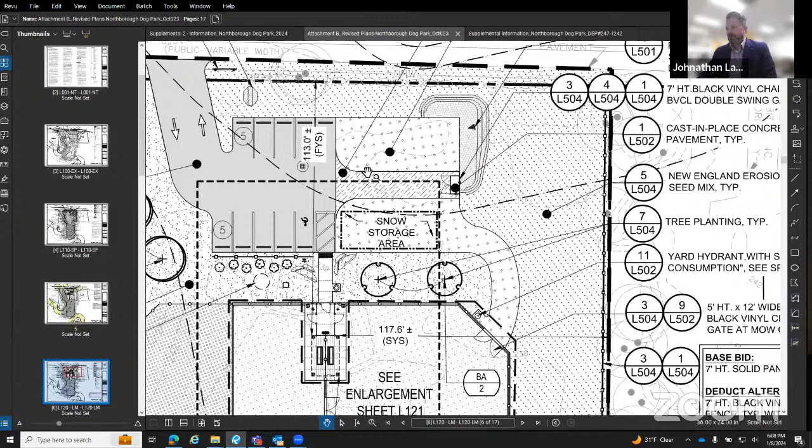Another change that has been made since you last saw this design was this overflow parking area. If you recall, it was originally going to be all asphalt millings. Now there's just this central section that's asphalt millings to access this small dumpster area, and then the rest of it will be 3/4-inch crushed stone paving.

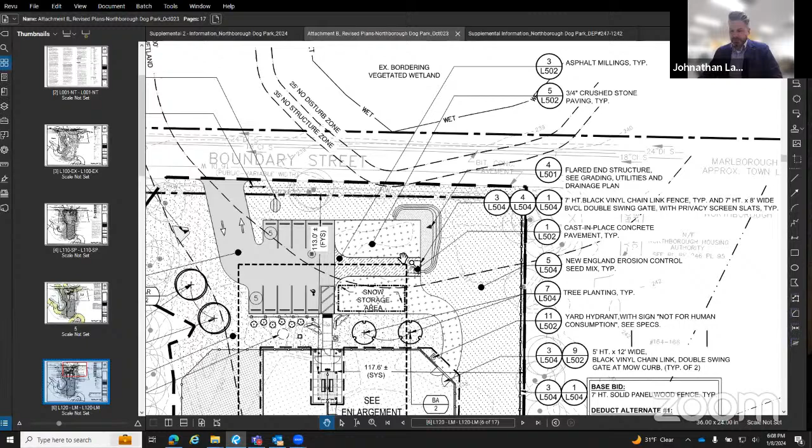The snow storage area is now located here. We submitted the documents, and on January 2nd got 12 comments from Vinny, which we've corresponded back and forth with him and addressed all those comments. Those are the major changes since you last saw this.

I believe that some of the grading was revised slightly to accommodate these new surfaces in this overflow parking area, but they all meet the current code requirements. With that, I'll open it to any questions.

Okay, good. Good. Thanks, Johnathan. Vinny, in terms of the response you have, where do you stand on that?

Yes, I've gotten the responses. I got a response to the comments, actually this morning. And they were good. They responded to the issues and concerns that I had raised in regard to their drainage, that the system is going to work effectively, and the conditions of doing a test pit in the basin portion of the infiltration basin were responded to.

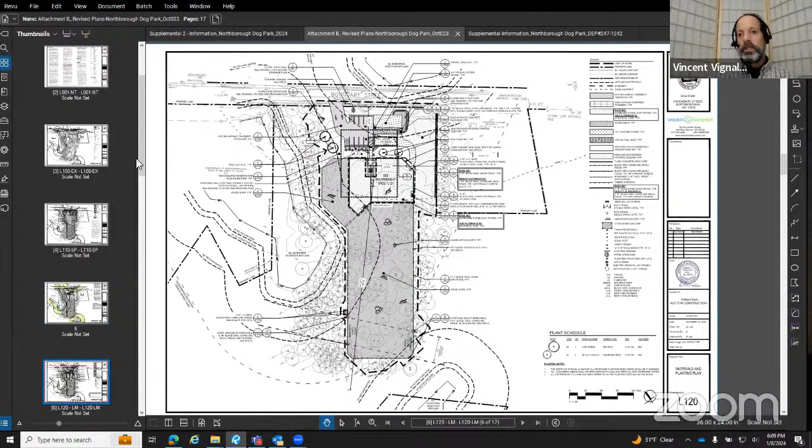That's going to be a condition of the approval. I've got a list of, I think, 7 conditions now that I had included in those responses. The first was the soil deep test for the soil.

And then the fill material in the compost filter tube had to be composted material. It's kind of common sense, but the detail originally had just said that it could have been just wood chips. So if it's going to be a compost tube, it should be composted.

They don't show—and I don't know if Johnathan can show where the collector drain discharges—but we were thinking I was going to add a condition that it has to discharge to the infiltration basin on the east side, so it's not going directly into the wetlands on the west side.

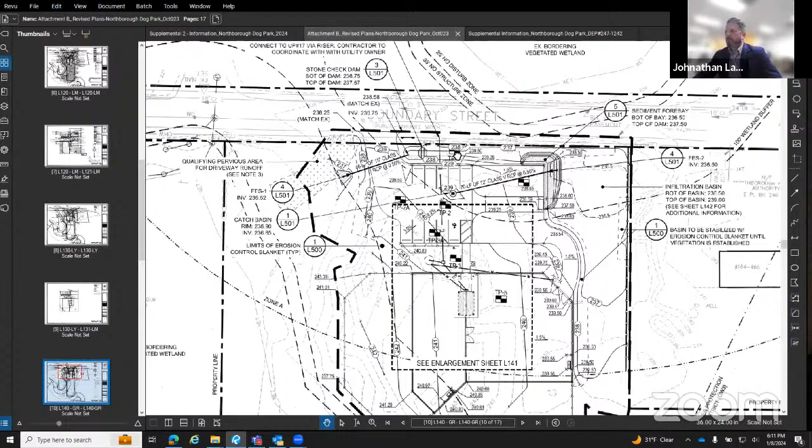Okay, so is it actually shown on the plan, Johnathan? Grading plan. Yeah, it was the alternate for the collector drain. I'll have to check that back with our civil engineer to see if he incorporated that. Okay. But that's a condition we can add in.

And then the long-term pollution prevention plan—they just submitted it this morning, and I need to review it to make sure it's approvable, but I just have a condition that it will get approved, or it needs approval before they get permission to start construction.

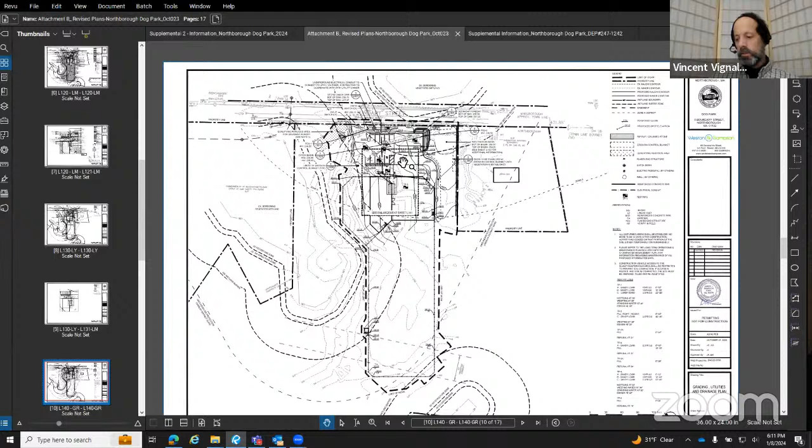Okay, yeah. And then there was a comment from DEP about a discharge within zone A for the reservoir across the street. Weston and Sampson said that they will revise or address that and resolve it with DEP. I was going to put that as a condition of approval, that needs to be done prior to beginning construction. And then actually the last one just came up.

The response that they submitted was submitted by a wetland scientist. She seems like she's doing a good job, but there were comments and responses in regard to flood elevations, drainage calculations, different treatment processes that you need. I was looking to protect the town to have a PE stamp or some other certification, a certified person certifying to that document. So Johnathan sent me an email a little while ago and said that he would have the PE take care of that. And so all those calculations and drainage calculations were performed by a registered PE, so we can have them sign that letter. Yeah. Okay. So those were the conditions or issues around the comments that I had outstanding.

So Vinny, are these conditions of concern for you, or are they ones that we could move forward with and just have them before construction begins? They'd have to sign off on those conditions, but we can start moving. Yes, that's what I was thinking. It's up to the commission if they have other issues or concerns. But based on what I've seen, I think it's in a state where we can close the hearing and issue an order with those conditions. Okay. All right. Let's see what the commission thinks. Any questions, comments, concerns?

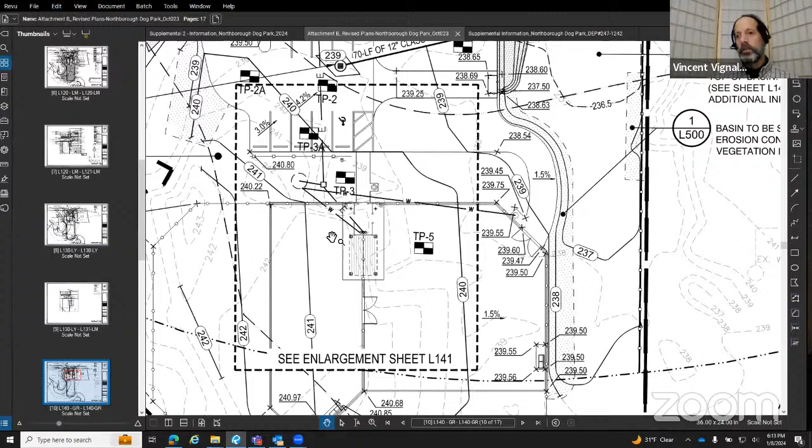Just quickly, Vinny, I got dropped for a sec, but the collector drain, where is that one? There's an alternate proposal for synthetic turf in the play area for the dogs. And within that, there's a collector drain that collects that. So it's going to have a lot of pee, we assume, because of the dogs. And so I didn't want that going straight into the wetland. I thought it should go into the infiltration basin. Okay. And I think the grading generally goes toward the east. That's the way they designed this, because the wetlands are off to the west. So it's the best layout really for the site, I think. That's correct.

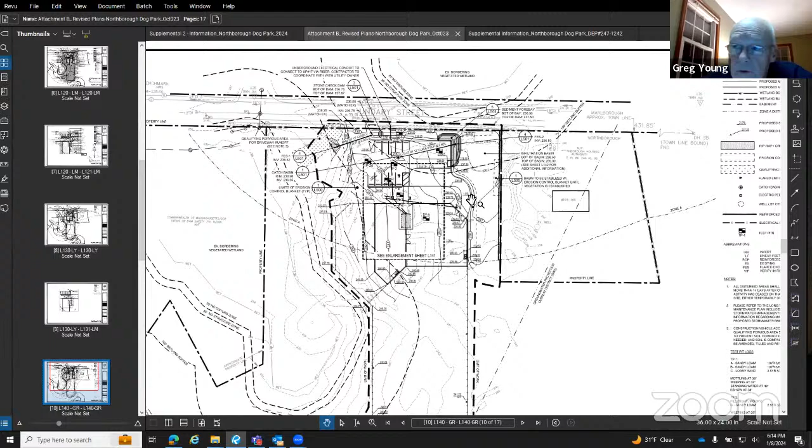Any more questions? No. Let me see if any general public, any attendees have questions. I don't see any hands up. Okay. So Vinny, it sounds like we can move ahead with closing the hearing and issuing an order with 6 or 7 conditions listed here. Yeah, we have our standard, I think 29, 30 conditions, and then we would add these 7. Okay.

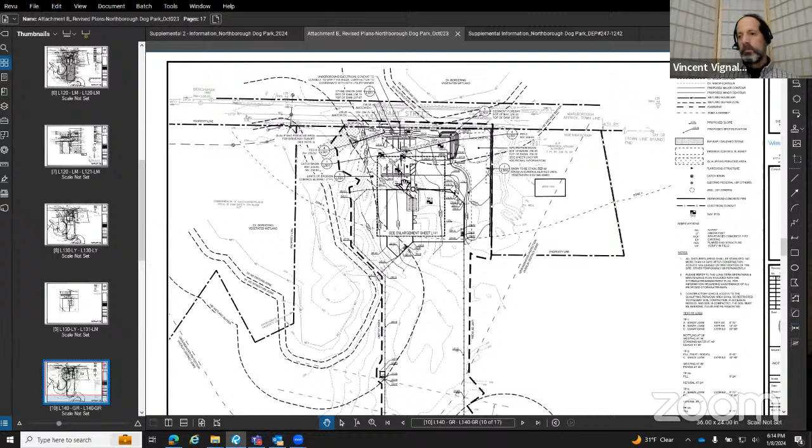Okay. Very good. Then we need a motion to close the hearing. So moved. Is there a second? Second by Diane. Roll call. Dan Clark, yes. Justin Dufresne, yes. Diane Gouldner, yes. Todd Helwig, yes. And I vote yes. Now we need to issue an order of conditions and a stormwater management and disturbance permit, Vinny, right? Yes, two, yep. For 150 Boundary Street, with the 7 conditions as outlined in Vinny's note.

So moved. Okay, is there a second? Second by Diane. Roll call. Dan Clark, yes. Justin Dufresne, yes. Diane Gouldner, yes. Todd Helwig, yes. And I vote yes. All right, the dog park is moving forward.

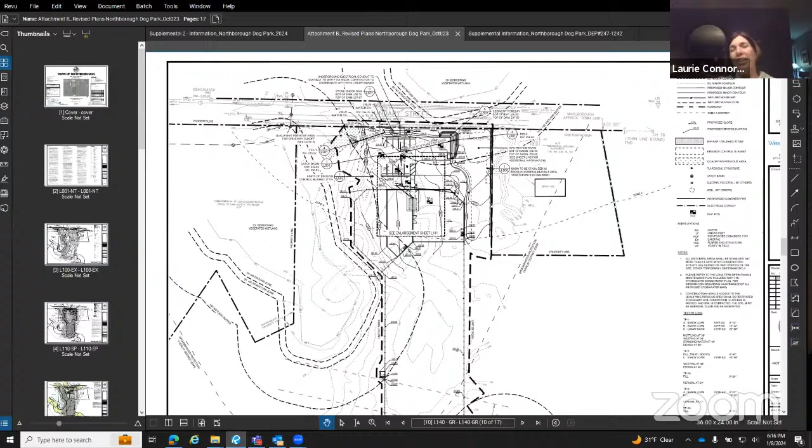Thank you very much for your support. All right, very good. Thanks, Laurie. Look forward to seeing you at the dog park a year from now. Okay, fair enough. Thank you, everybody. Thanks, Johnathan. Bye. Good night. All right. You're a welcome addition to town.

Let's see, continuations here. We have a stormwater management, 311 Crawford Street. Yes, they submitted a request for a continuation to the next meeting. They're pulling paperwork together and away on vacation, I think, is the current status. Okay. Do we think we'll actually see something next month? I think so, because they're getting things ready for the construction season, so they need to have something ready so they can get a price for whatever they're going to try to build. Okay. All right. I guess we give it another month here. We did open this in May. At least we'll get something in front of us before May. Oh, I hope so, yes. I'm hoping to see something in the next month. Okay.

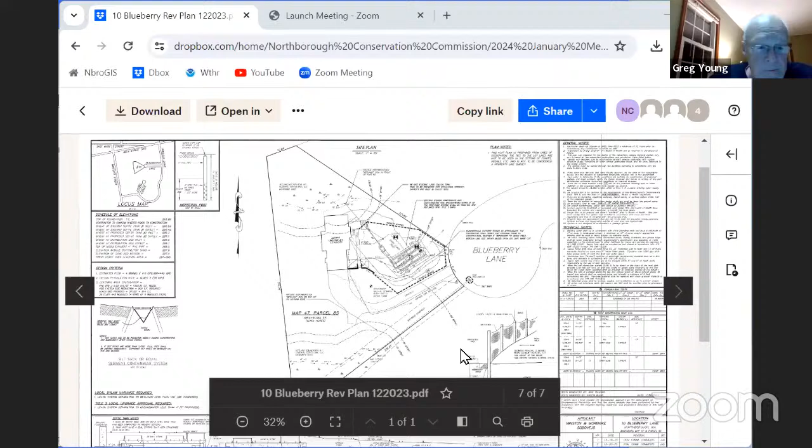Do not see Vito. Okay, let me see if I can pull up the plan. So, 10 Blueberry. Come on. Sorry about that. Oh, no worries. All right, let me see if I can share the screen. I see something. Yep, I gotta zoom into it, but I'm not sure which zoom I'm looking for here. Here it is. I think so. That's the one. Yeah. Oh, why isn't it dragging across? I guess I have to use this. Yeah, these computers are new to me.

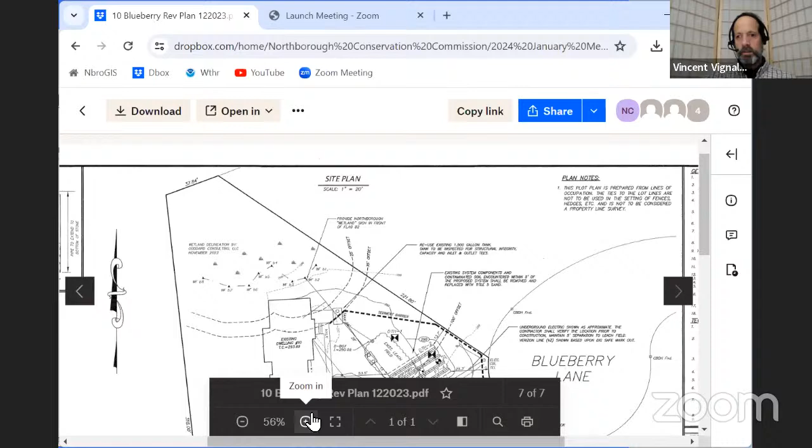Okay, Blueberry Lane, this is a septic system repair. Blueberry Lane here, it is off of Hemlock, and north is straight up the plan. They have an existing house. The existing septic system is right in the middle of the front yard, and it failed. They have wetlands to the north and wetlands to the south, and a big pool in the backyard. Greg said the commission did some investigation or looked at this property for the pool in the past.

So what they're proposing to do is replace the failed system with a new system, no increase in size. They are 82 feet away from the wetland to the north, and this is the 100-foot buffer line from the south, so they're about 104 from the south. So they're splitting the distance as best they can and fitting it in this corner of the lot. The driveway comes in here around to the house. It looks like it's the best they can do for a tight site. It's a repair, so that should be an improvement.

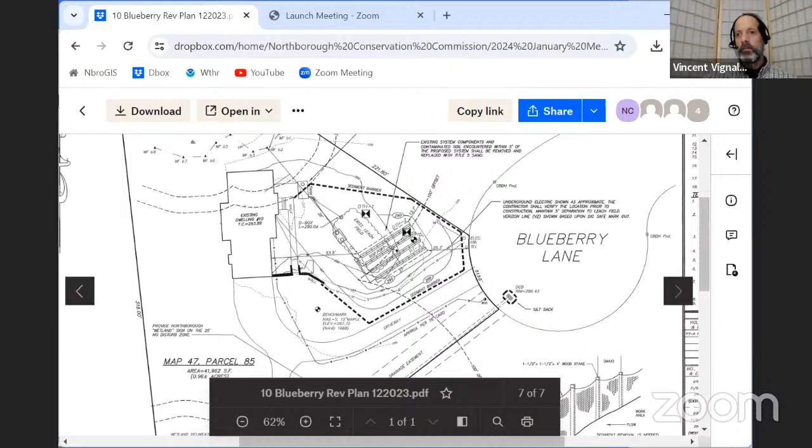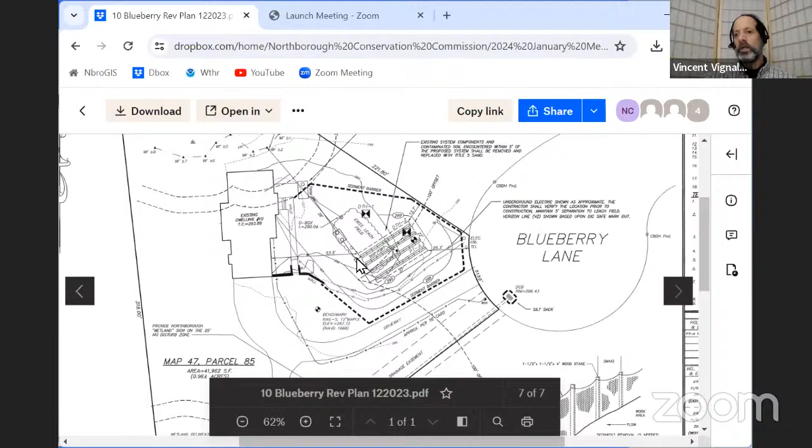It's pretty much the same footprint, right? Yeah, pretty much, same area of system. This is a different kind of system. I think it's one of the modular Eljen modules, so it should work a little more efficiently. And they're going to have to monitor the septic tank. Actually, I think there's a pump in this one. No, so it's Eljen units, and it's just a regular septic tank to a D box.

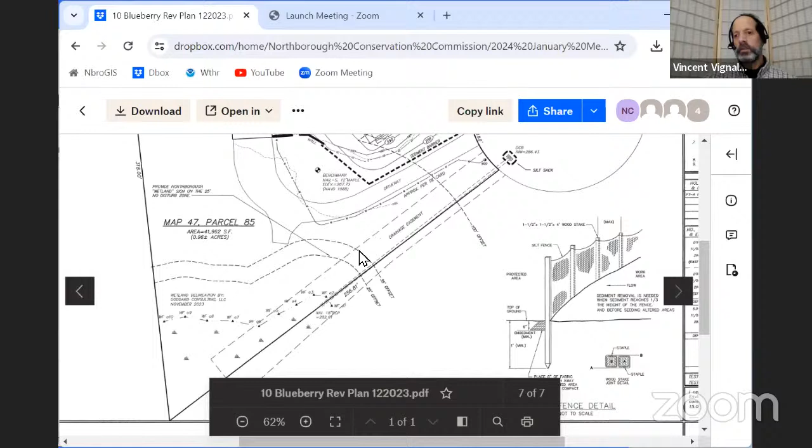Okay. The only issue I found with this site was that there's a little access road that comes out here, and there was yard waste, branches and things in the 25-foot no disturb zone in the south, with some tires and some kind of automobile parts. I have a photo, but it might take longer to find it and get it up for you. But what I'm hoping to do is get your comments, and if appropriate, we'll issue an order and require as a condition that they clean up all the material in that 25-foot buffer zone before they can start construction on their septic system.

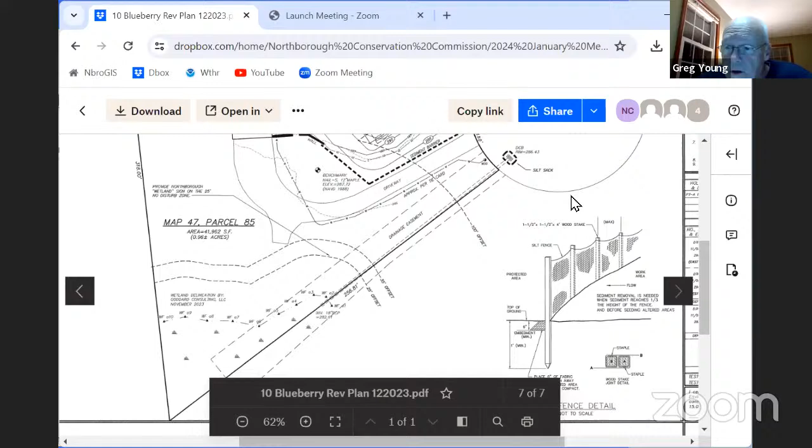All right. It seems reasonable. Any questions, comments or concerns from the commission? Looks good to me. Yeah, okay, it looks clear. I don't see any hands up in the audience. Okay, then we need to close the hearing on 10 Blueberry Lane. I move that we close this hearing. Second. Second, was that Dan? Nope. Todd. Roll call vote. Dan Clark, yes. Justin Dufresne, yes. Diane Gouldner, yes. Todd Helwig, yes. And I vote yes.

All right, now we need an approval to issue an order of conditions for 10 Blueberry Lane with the usual conditions, Vinny, plus the one you mentioned about cleaning up the waste area by the southern wetlands. Yes, that'll be before they can start construction of the septic system. Okay. Need a motion for that. I move that we issue an order of conditions, as usual, plus the one that indicates they will clean up the mess. Mess isn't exactly the best word. The debris, yes. The debris, before they get a new septic system.

Is there a second? Second. Roll call. Dan Clark, yes. Justin Dufresne, yes. Diane Gouldner, yes. Todd Helwig, yes. I vote yes. All right.

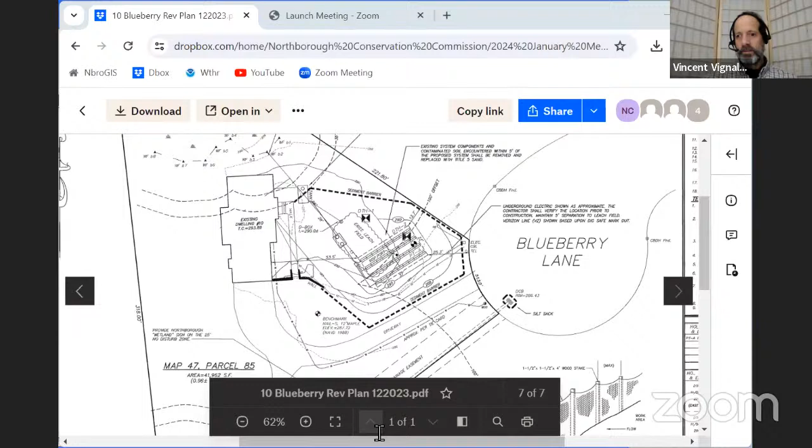We'll hold off till you take that down, Vinny. I know you're working out of... Oh, I'm sorry. Whoops. Trying to. How do I get there? Too many screens going. Stop. Here it goes. Perfect. All right.

The next one we have is 14 Mohawk Drive. That is an RDA for a failed septic system. I don't see any hands up. I was afraid you were going to say that. That was Vito as well. 14 Mohawk. And I will bring up the plan.

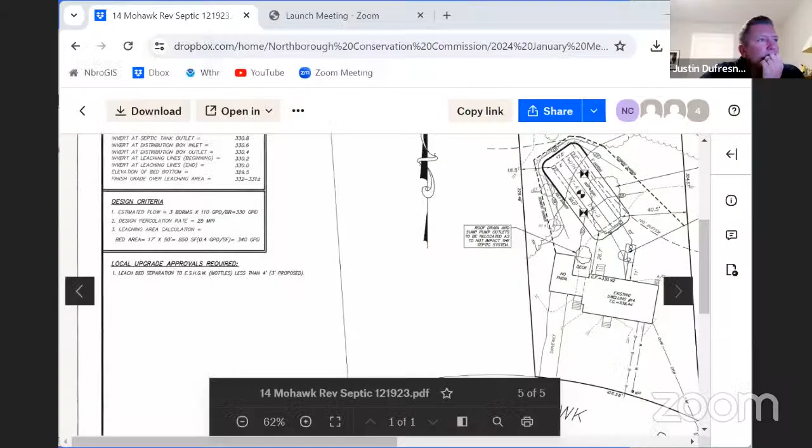This one, Vinny, doesn't look like we have a DEP number on this one yet, huh? Unless we've gotten it. We don't need one. This was a request for determination. Oh, it's just an RDA. Okay. It's only an RDA, right? Yeah. The next one doesn't have a DEP number though. Okay. Oop, too far. Okay, let me zoom out a little so you get the idea.

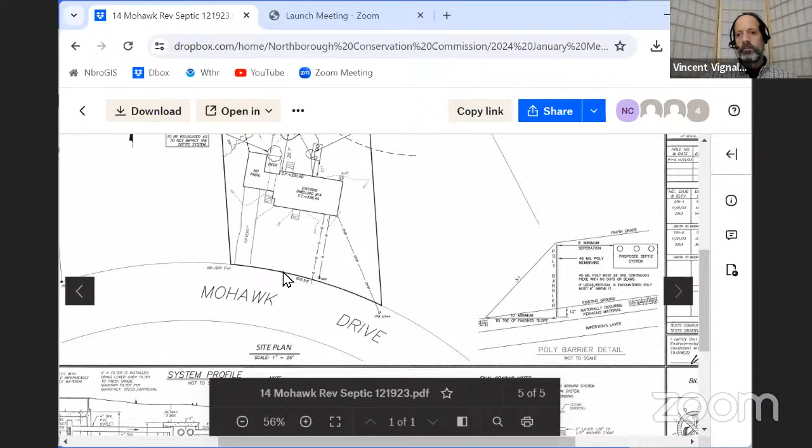So this one, we have wetlands in the rear. And we have Mohawk Drive in the front. Mohawk is off of Washburn, off Whitney. The location is basically the same issue as the last project. There's an existing septic system in this location. It failed, so they're proposing to put this new one a little bit larger, a little tweaked counterclockwise.

And the wetland location is up in this area, up to the north. And where my 100-foot buffer zone lines are here, runs here and then down, I think. Oh no, down here. So the system is located about 102 feet away from the nearest wetlands there. So what they have is, they're trying to repair it, no increase in size in the structure. It's just a simple repair.

They are proposing to put in 2 signs because there's a little bit of activity. There's an old collapsing shed out back, but this is a 25-foot no disturb. So I asked for a sign in this area here, and that's what the note says, to put a sign here for wetlands no disturb, and then one over here, wetlands no disturb. So that we assume that it's being sold, so people that buy it are aware that they can't expand into those areas. Yep.

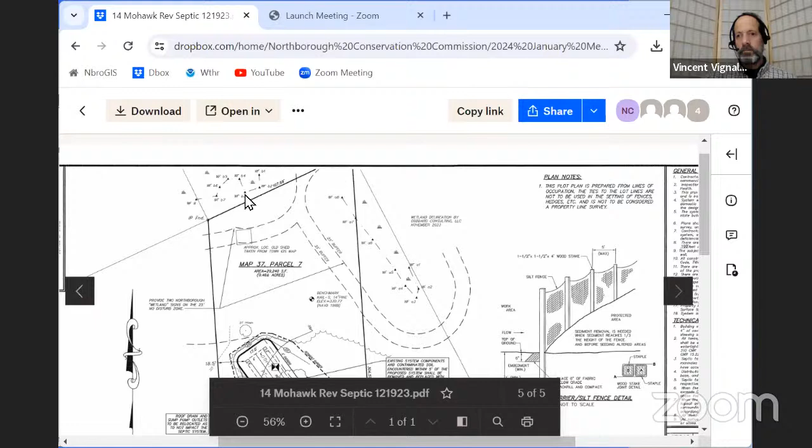It's 102 feet? Yes. This is the 100-foot buffer zone from this wetland. This is 25, 35, and then 100. Oh yeah, they just barely encroach in a little bit inside the 100. Yes, they got some grading inside the 100. Okay. That's why it's an RDA. So nothing special, Vinny, other than the usual? No, I think this one, I made comments and Vito same day changed it up and added the signs, and I think we're ready to go.

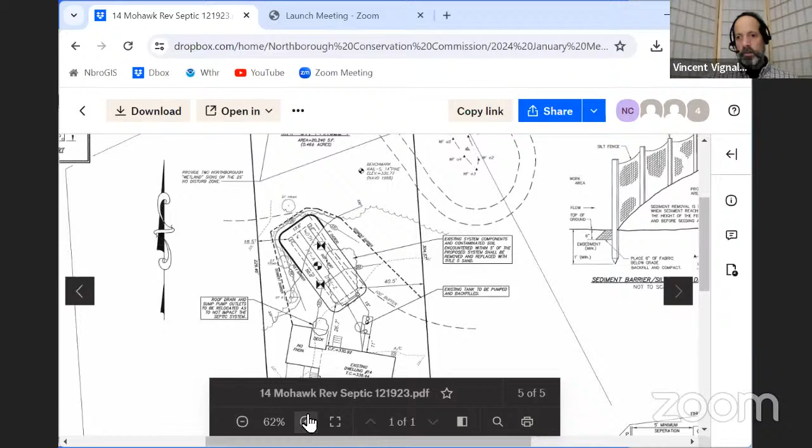Any questions or comments, concerns from the commission? I have a question. Is this lot particularly just flat? There's no grading or anything required? Correct. There's limited grading. You can kind of see this solid line here. I can zoom in a little. So this line here shows the grading that goes out. This is the existing contour coming like this, and then another contour that comes right there. So they're filling maybe a foot and then filling down here about 3 feet, but it drops right off.

They have an impermeable liner to keep the grading limited. They're actually trying to protect this tree, so it keeps the impacts away from our wetlands that are in the back here too. So it's very limited grading. It's not like it's a big fill system. Thank you. Good question. Anything else?

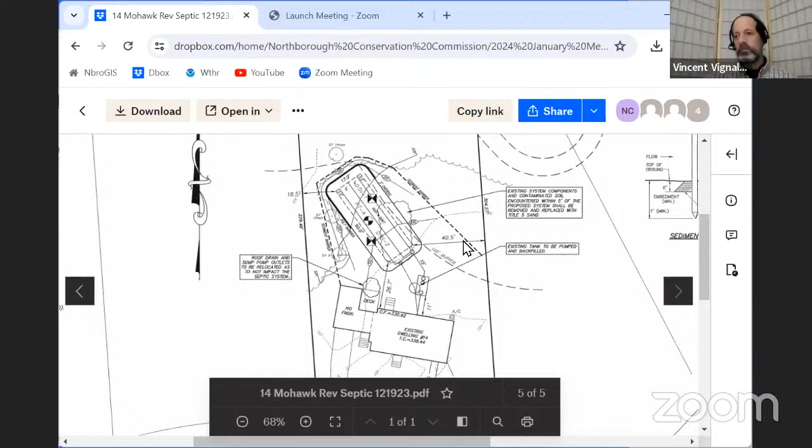No. So Vinny, I think we're looking at a negative determination here with just boilerplate, right? Well, actually, we don't have standard conditions, but just a condition that they notify the commission 48 hours before they do the sediment control, and I'll inspect it. And a couple of signs will be a little different. Yep. Well, they're on the plan, so we'll just have them follow the plan. Good.

Okay, so I think we need to close the hearing to start this. Need a motion to do that. So moved. Okay, is there a second? Second. Roll call. Dan Clark, yes. Justin Dufresne, yes. Diane Gouldner, yes. Todd Helwig, yes. And I vote yes.

So now we're looking to issue a negative determination for 14 Mohawk Drive with nothing added special, Vinny, right? Nothing special, correct. So moved. Is there a second? Second. Seconded by Dan. Roll call. Dan Clark, yes. Justin Dufresne, yes. Diane Gouldner, yes. Todd Helwig, yes. And I vote yes. Okay.

We are now looking at 6 Hillside Road. This one I know I'm going to get help on. I think Zoe's here. I see Zoe Croner. I'll bring Zoe in.

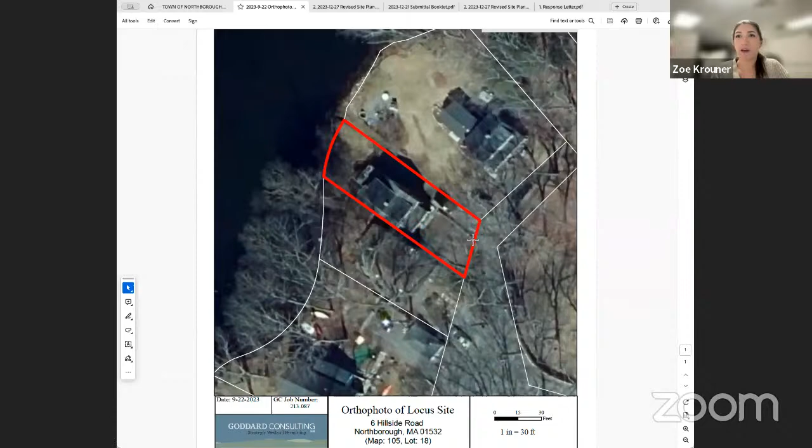Small lot, come down Hillside Road. The driveway looks like it's partially off-site. The driveway comes up, stops around here, and then we've got lawn that goes around the side and the back, and then we have the bank of Smith Pond over here. There's a little small retaining wall here with lawn and a walkway that leads up to the house. The back of the house.

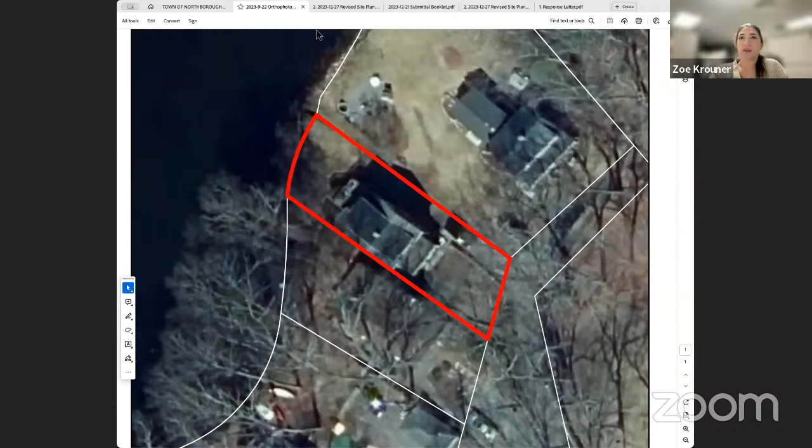Excuse me, Zoe. I don't see your pointer on my screen. Oh, sorry, that's probably not helpful. Let's see. You can't see my pointer. Okay. Well, I'll pull up the site plan. Maybe that will be better. So this is the site plan that we submitted. Still can't see my pointer, right? Yep, I can see it. It's small, but it's moving. Oh, okay, perfect.

An old concrete patio. And so the site is within the 25, 35 foot no disturb and no build. The whole site's within the 100-foot buffer. The applicant's looking to renovate some parts of the house within the existing footprint, renovate the back deck and that patio area that's underneath the deck. The applicant understands that he's within the 25-foot no disturb and 35-foot no build zone. So he understands the importance of renovating just that existing patio piece underneath and not extending past that to respect those buffer zones.

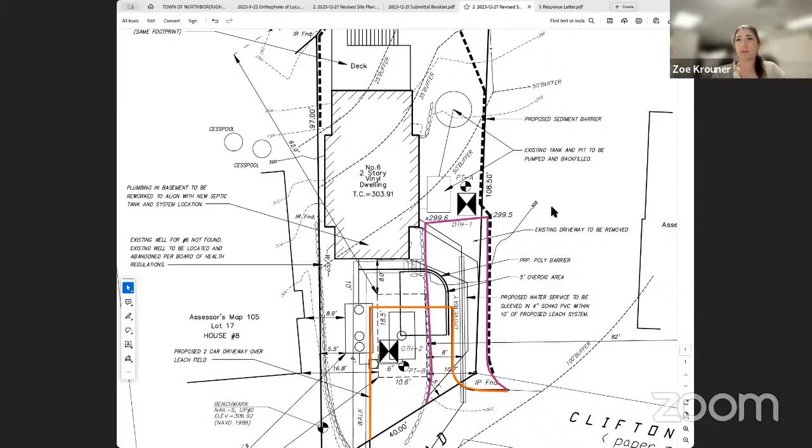And additionally, in that time frame, the applicant had originally proposed an overhang extending out of the front of the house here, but he's no longer proposing that. So that was one main change to the site plan. And of course, we have the erosion control proposed along the side here and around the back. And I think that completes my overview, and I'm happy to answer any questions.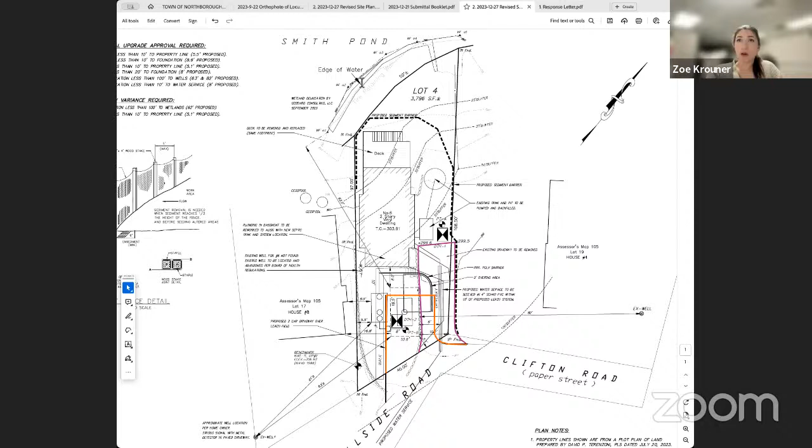One question I have, Zoe. It's a tough location, number one. For sure. What's going to happen between the edge of the water and the deck? So between the edge of the water and the deck, really nothing except for the erosion control. Okay, so you leave it as it is. Leaving it as it is, there's some maintained lawn area. The limit of lawn's not shown on here, which isn't super helpful. But I could pull up a picture. So here's a better picture of underneath. Just maintaining it as it is, and getting rid of this old concrete patio slab and putting a new piece there to not expand any impacts.

Is the deck coming down too? The deck's going to be, yeah, totally redone. Okay. Same size, same footprint exactly. Okay. So nothing in that area in front of the house, between the house and the water? Between the house and the water, no.

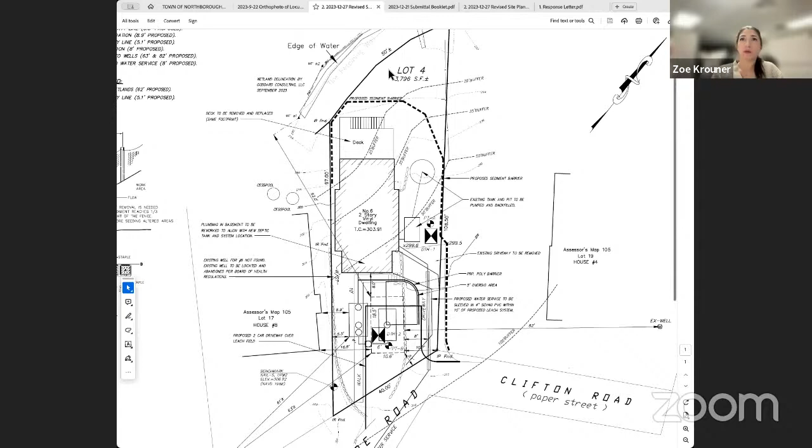Actually, if I could share my screen, I've got a couple of photos. All right. Does that mean I have to stop? Yeah, go up to the top and stop sharing. You'll come back on, so don't move away from it. Okay.

So I've got an image of that area that Greg is talking about, with a model as well. And so we've got this area that is the concern. It goes from here and it drops right down to the pond edge. Yeah. But this area is kind of overgrown. I think I have, how do I move this screen around? Okay. Actually, that one had it a little bit.

So this one you can kind of see that the erosion control fabric, sediment fence is going to be going pretty much where our model is standing, and then around to the left and around the back of this area. Yep. Looking from the right side, looking back at the deck, this is what the shoreline looks like. So my question, and I think the concern that Greg raised is, I assume the new homeowner is going to go in there and do something with that. I may have another photo of it, but no, that's just the plan.

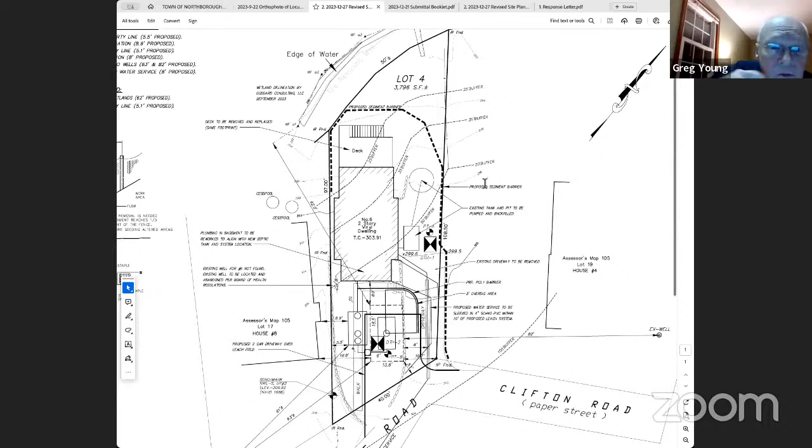One question I have here, I guess it's to Vinny and to Zoe, is can you put that picture back up of the front of the house. My picture or Zoe's? Either the picture or the plan, it doesn't really make a difference, just so I can point, as long as the front is shown down toward the water. Good. Yeah. So this whole area that we have here up about lot 4, this whole area is tires. The embankment is, yes. There's rubber tires all stashed in there, 2 or 3 high. Actually comes in a little bit too on the side there.

Are we gonna just plan to leave it as it is, Vinny, or not disturb it, or what? Well, that's part of the question. That is the existing conditions, they built the retaining wall with tires and filled behind it. And they're not proposing to do anything with that. Okay. It's now covered over with a lot of bittersweet, so I would be fine with removing bittersweet, but I don't know what else is being proposed.

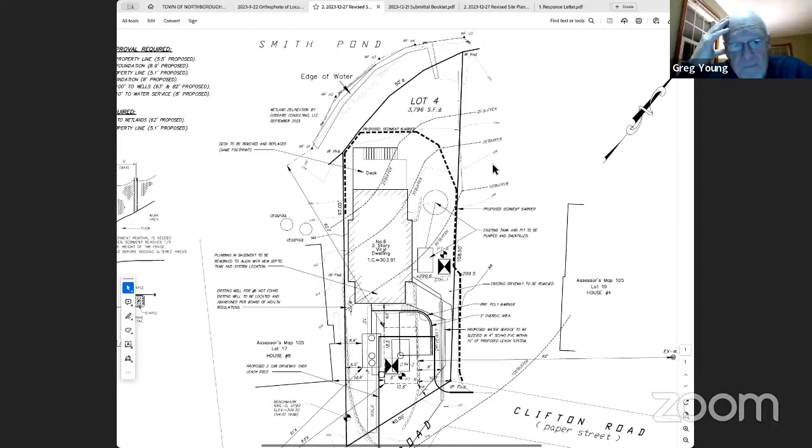It looks like it's not their property. If I'm looking at the property line correctly, the property line is inside of the tire line, so they don't have the right to go out into that area. So that's what I'm trying to figure out and get the proponents to propose something or commit to not doing something. Okay. Who owns that? Who owns the tires? Retaining wall. I'm assuming that they were installed and constructed by the prior owners. And I think the prior owners thought that they owned right up to the pond edge.

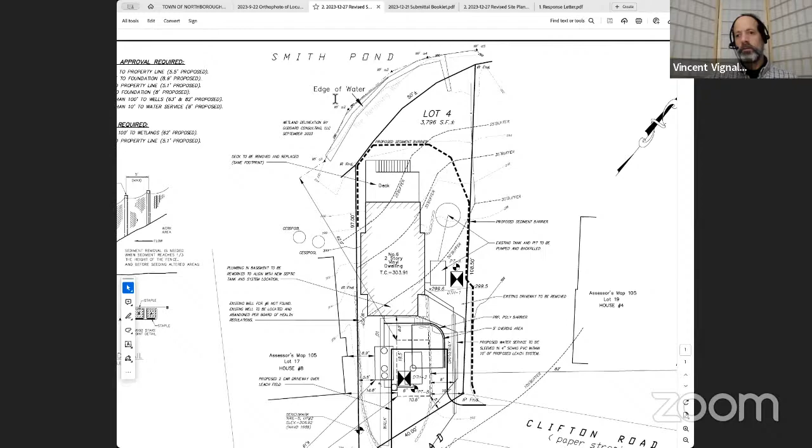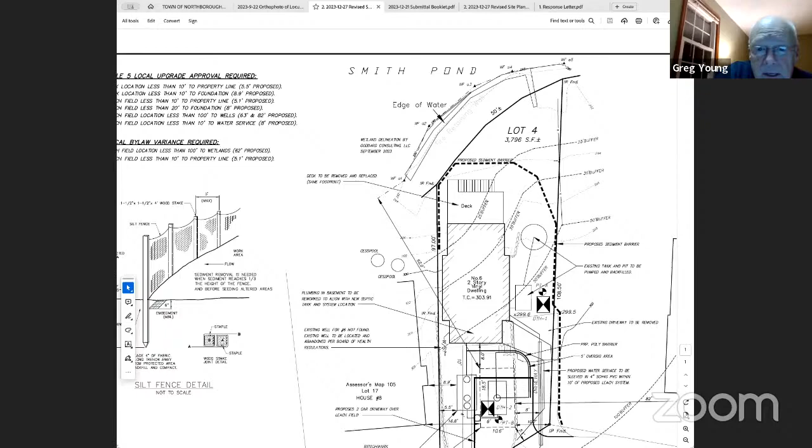But is there an abutter listed? Can you zoom in to see if there's an abutter listed on Vito's plan? But that's Smith Pond. It doesn't look like it's there. Yeah. Well, because when I walk down, if you go down the property line heading toward lot 4, the tires actually come up around the side there too. Yeah, there's kind of like a ramp in the northeast corner, and that's a ramp down, and the tires form a retaining wall on the left side as well as along the bank side. So as you're driving down the ramp, it's on your left.

So I don't know if we want to do anything with those, or if remediation would cause more harm than leaving them alone. But that's one of the things we're looking for some guidance on. Yeah. Well, we don't have a DEP number on this right now, so I think Zoe hopefully has time to get a response and come up with some idea or plan of what they would like to do and what they can ask permission to do.

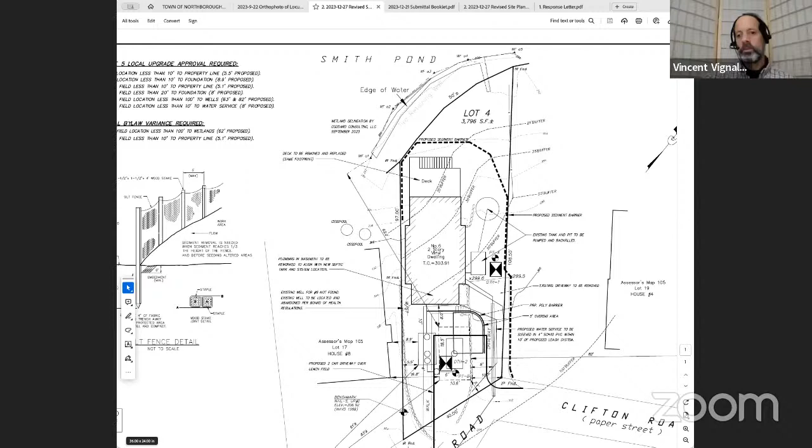It's part of our vast real estate holdings. That's right.

But I think we need to look into that. I think we have to work through it. And I think Zoe will come up with some good ideas, right?

Zoe, you still with us? Yep, sorry, I forgot I was muted. You know where I'm coming from here, you know what we're talking about, the area there, right?

Yeah, so you guys are trying to see if the applicant would be willing to, I mean, I guess I haven't really gotten a certain answer. So you guys want us to figure out whether it makes sense to remove the tires or not, leave them as is, or remove them, and I don't know the answer to that question vegetation-wise. So I'm looking for some guidance on that from whomever. Maybe the commission has some ideas on that one too.

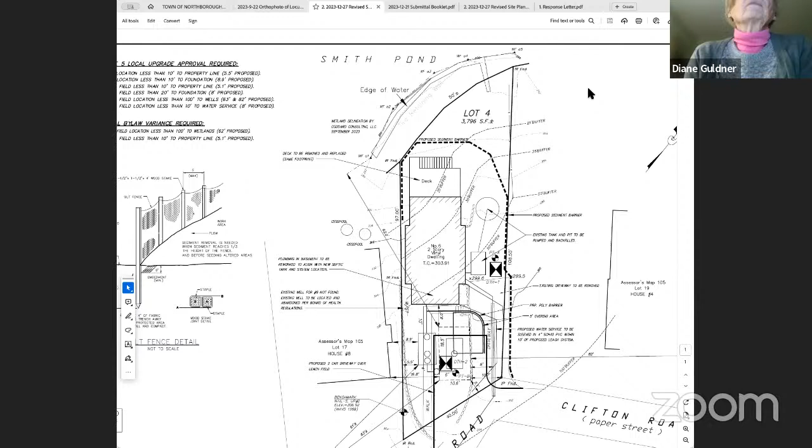So I'm not sure - like Greg's point is kind of the basis, will removing them be more detrimental than leaving them? And we need some research into that. Yeah, because I think there could be a lot that goes into that, Vinny, with potential silt - obviously a lot of silt issues could happen. So you're looking at some type of

something that you have to put out in the pond so that silt doesn't get everywhere. You have to get equipment down in there, and those tires could go deep into the ground too, so I don't know what the depth of them are and the stability and all that stuff. So I guess it's just something maybe for the applicant to take a look at, come back to us at the next meeting with some thoughts on it - overall, is it still stable, and if they were to take them out, what does it involve? Could be more expensive overall than this whole project is, to get those things out of there. So I think it's different than - I know Todd had mentioned the pile of debris - I think this might be a little different than that, but I think we need the applicant to tell us where they are, because this wouldn't be the time to do it, right?

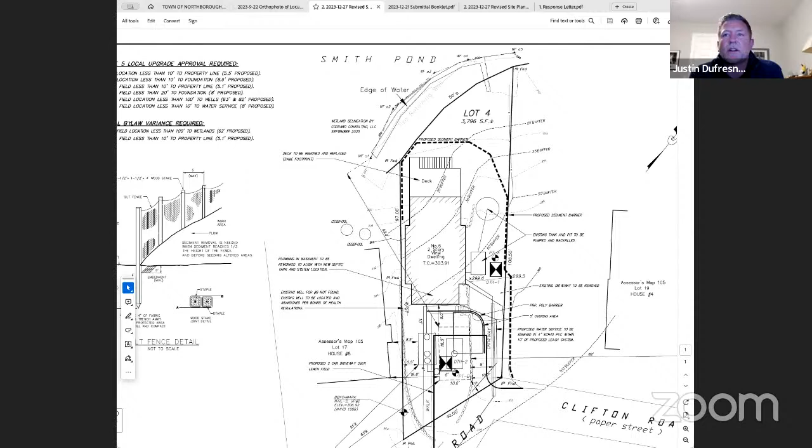You're going to have a bunch of equipment out there, you're going to be doing work and everything too. So while you have equipment, while you have access to the back there, now would be the time to do it. But I just, we would need some direction on the stability and whether or not it makes sense to do it, or if it's better to just leave it in place at this point.

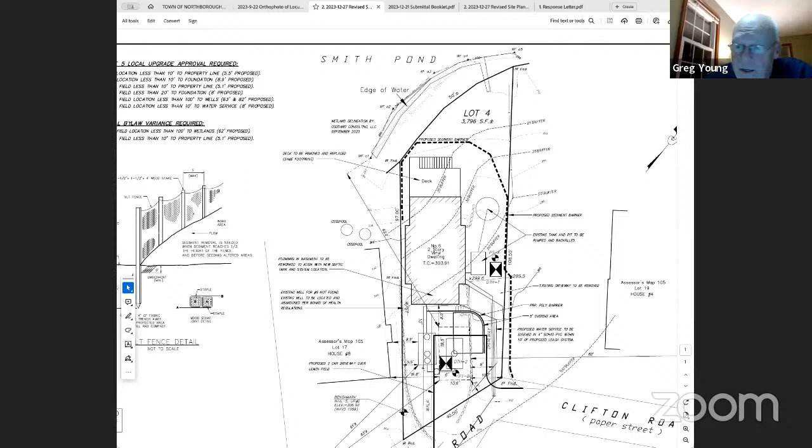Yep, I agree. All right, anything else? Just from the commission standpoint, if you're out and about over the next month, folks, if you're driving down Otis Street, take a ride into Hillside, take a walk down, you'll see the house. When you pull right in, it's looking right in dead ahead. Walk down and you'll see the tires and you'll get an idea what we're talking about.

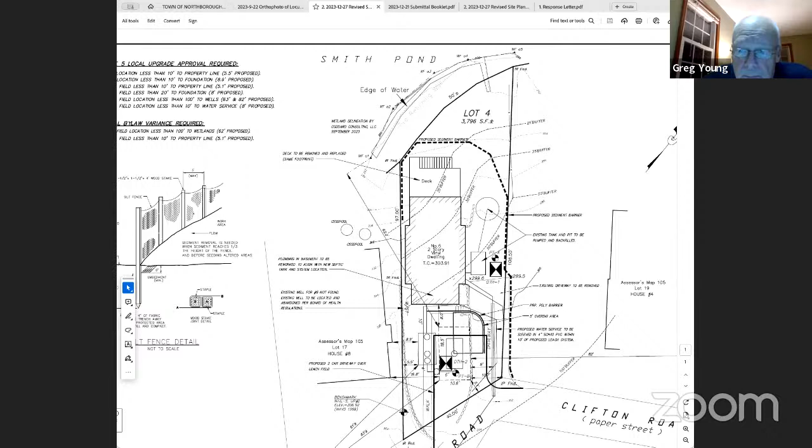So let me check here. I thought we had some, you got a hand up here. I've got a hand, Scott Rogers, I'm going to bring you in as a panelist. I think I am, you are in process. Scott, you with us? Yeah, hi Greg, thanks for letting me join. No questions or anything, I was just watching the meeting. Oh, you had your hand up, so. Oh, did it do a hand up? My apologies, didn't mean, it must have been a slip. My apologies. Okay, no worries.

So Zoe, I think we're all set, right? We have no DEP number, so we can't close anyway. We got a couple questions here.

Oh, and just a final follow-up. The other question they didn't address was the idea of the septic system separation of groundwater. So I checked with the Board of Health and they haven't seen the plan yet. So if the Board of Health approves it, then it's going to be approved, and then we just review it based on that. So I let the Board of Health folks know, Mike Seeger, know the question, and he's going to, when the submittal comes in, he's going to let me know what they've decided. Good, okay.

Anything else from the commission? Any more questions, comments we have here? Okay, then we need a motion to continue 6 Hillside Road. So moved, is there a second? Second. Second by Diane, roll call. Dan Clark, yes. Justin Dufresne, yes. Diane Guldner, yes. Todd Helwig, yes. And I vote yes. Continued till February. What's the date? Sorry, February 12th. 12th, okay, thank you everyone.

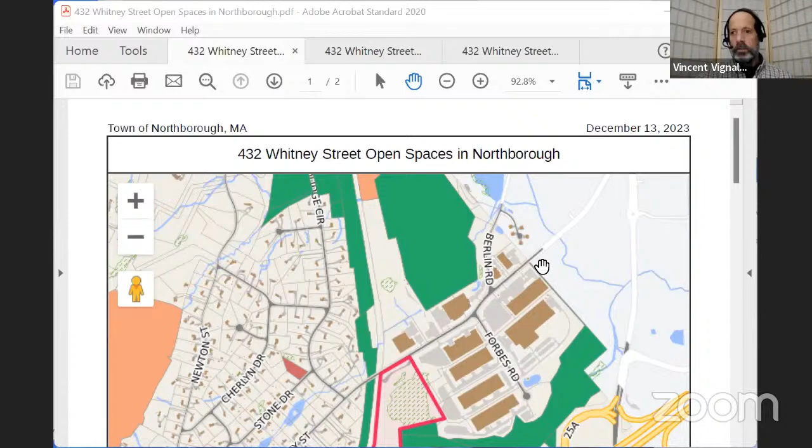All right, let me, come on. All right, there you go. So this was a sketch that I pulled together showing what that does.

Whitney Street going bottom left to upper right. The town boundary is right here with Berlin. In red is 432 Whitney Street. The property is just to the east of the CSX Railroad, which is just to the east of the Wachusett Aqueduct.

So currently, there is no access between this open space, which is owned by the DCR flood control folks. Actually, the one area down here, I think, is ponds and lakes, and then flood control in this area for the Barefoot Brook flood control. So currently, we have a trail going down the Wachusett Aqueduct Trail and no way to go across the railroad tracks to get into this property.

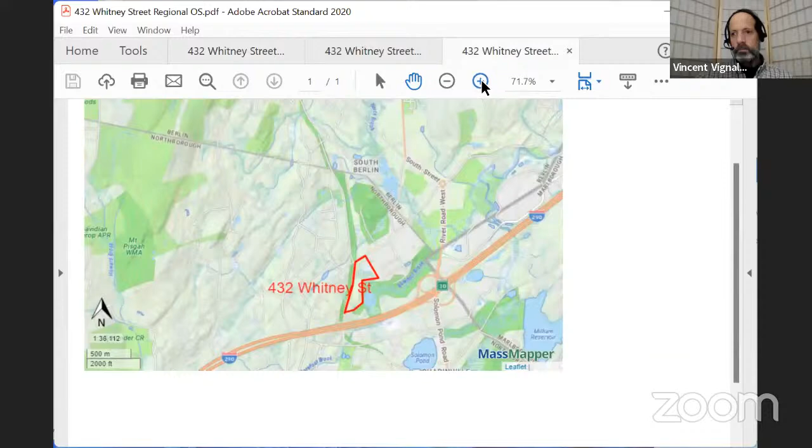What this property in question will provide is we go across from the Aqueduct, across Whitney Street, and then down through this property, and then we could gain access for a trail system to go off and tie into that. To zoom out a little bit, that image gives you an idea that 432 Whitney ties into that Barefoot Brook flood control area that then goes even farther downstream into Berlin, and then across 495 is just on the other side here, and then you could get into Hudson. So it's definitely a connection for an east-west corridor that doesn't exist right now. So that's a benefit of that.

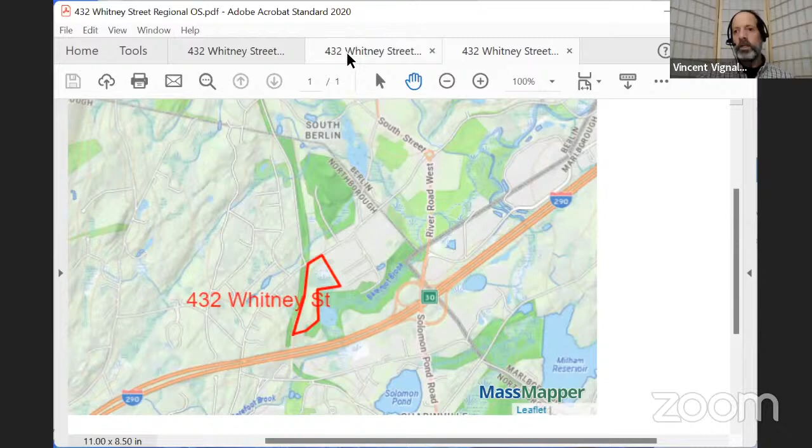I also kind of pulled together, this is the notice of intent to sell or convert property. So this is where it comes in, is that it's chapter 61A, and the town has the right of first refusal. So that's kind of the background. You guys are all more familiar with it than I am, so I'll let you discuss it. Okay, good.

Yeah, I think we've all walked that property at least 6 or 8 times over the last 10 years, so we've got a pretty good idea of what it is or isn't.

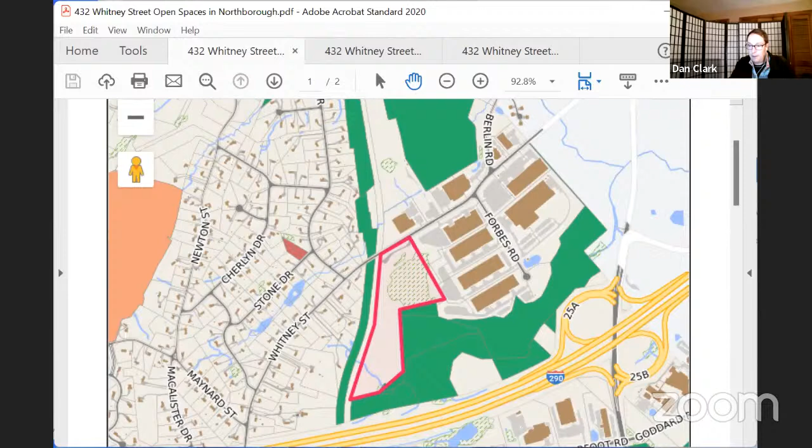Dan, open space vote on this one, right? Said yes? Yeah, I think there was unanimous consensus. This was a high priority parcel, and we all thought it'd be worthwhile for the town to exercise the right of first refusal for lots of reasons. Some of Vinnie's mentioned, and it's a good open space acquisition in terms of size and connectivity to existing open space.

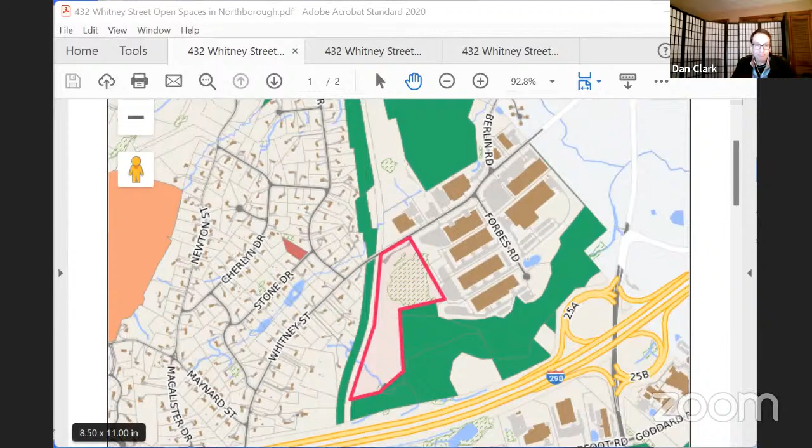So we were all in favor of it. Has planning voted on this yet? Yes, they did, and they recommended to acquire it. And I think the select board's doing it tonight, right? It was up for discussion. They were hoping to get your feedback. I told them that it was coming after our meeting tonight.

I did get... go ahead. I hadn't gotten a response back until this afternoon from DEP on the idea of uses. The Conservation Commission has... there's a big wetland right in this eastern portion. You can see an existing drive that everyone's aware of along the north edge, but this wetland here kind of limits the development going down to the southern portion of the site.

The current area is zoned commercial industrial, and so that development is allowed, and the buyer has a history, I was told, with a rail operation. I wasn't sure how the Wetlands Protection Act and what kind of jurisdiction there was for a rail operation. When I talked to the person at DEP today, she said rail operations consider themselves exempt, and DEP has not gotten a legal determination to force them to comply with the Wetlands Protection Act. So I believe the use of the term is railroaded.

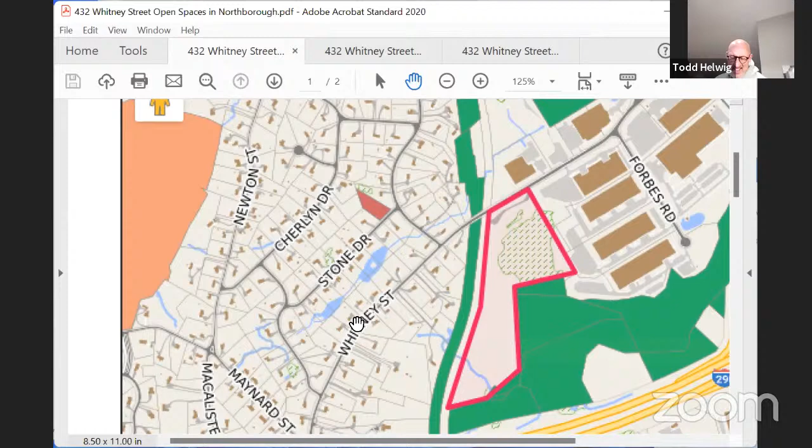This actually came up at the Community Preservation Committee meeting last week, where we vote on projects, and it looks like they're going to have about $1 million to spend. This is likely going to be the thing they spend it on, but they're still going to need some money from someplace else. There was also discussion, and we don't know whether it would work yet, but it might be part open space, part affordable housing, if it could be worked out.

Yes, so I just wanted to mention, we were talking about all these open space purposes for it, but there was also discussion about having the money come from two different pots. Part of it would be for open space, and like you said, it's tough to get in there, but if you do, there might be some room for some affordable housing in the back.

Yes, and from prior conversations, it is something that can be done. It would definitely not go over the 5,000 square foot wetland fill limit. If they were to do some filling to get an access road in, it would be narrower, pushed up against the western shoulder here, the western property edge. But it is feasible to build a road up to the area up top. It's actually a beautiful view out to the east, overlooking the wetlands down below and the pond system down here, so it would be a good opportunity for housing.

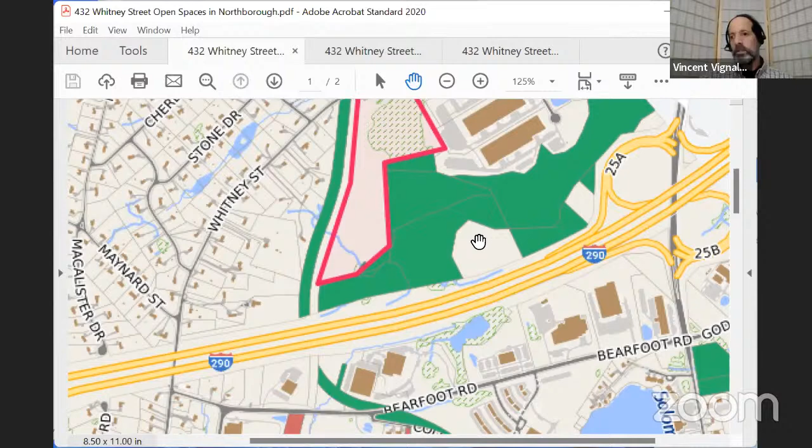And where does this green parcel stop at the other end of this map? Is that up in the parking lot up there? Well, the green continues, but that's where the town line is. Yep, town line is there.

Okay. You all set, Diane? Well, I'm just thinking that if you put in housing, you're probably going to have more and more people using this wetland area. And where, other than the property that's outlined in red, where would they enter and exit?

The wetland area? Yeah, long way away from anything being planned about that. Well, they could, yes, and that's true. They could walk from here, walk down the road, go to Forbes Road, go to the end of the cul-de-sac at the end of Forbes Road, unless that's private. I think that's public. But there's fencing down there, for one thing. Okay. But I'm looking at that as a loop.

Okay, but I'm just thinking that knowing when people congregate and they want to go for a walk or they want to do things, they will spread out and use it. So if it's going to be used, even if it's not set up as a park or a walkway or anything, we should have some control over where people can enter and exit. Okay. Yeah, that sounds good.

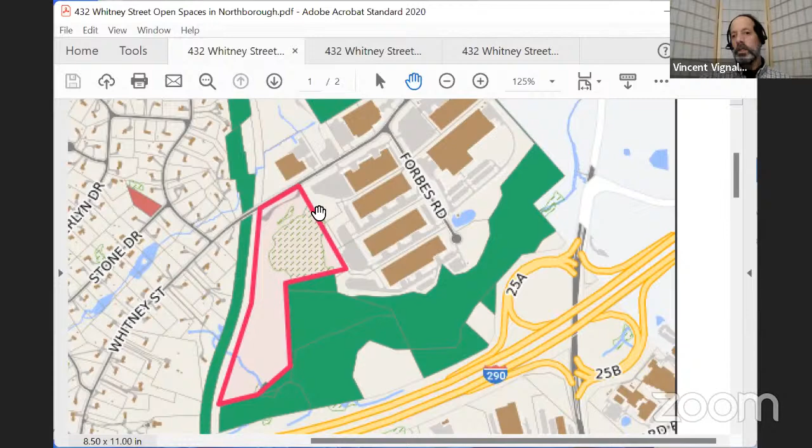I think we were talking about if this was going to be a parking area, we're going to utilize the existing stone dust path that goes in there in that open area to have a parking area for people to kind of go around and go up to the Wachusett Aqueduct Trail there, and then think about building something in here. So it was just under consideration that it might be possible to have that as parking for a trailhead, and then have the road continue on and go to the development of a housing property up top.

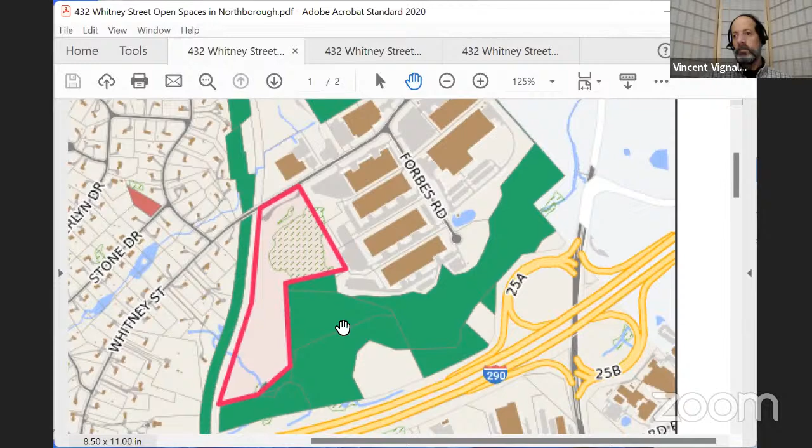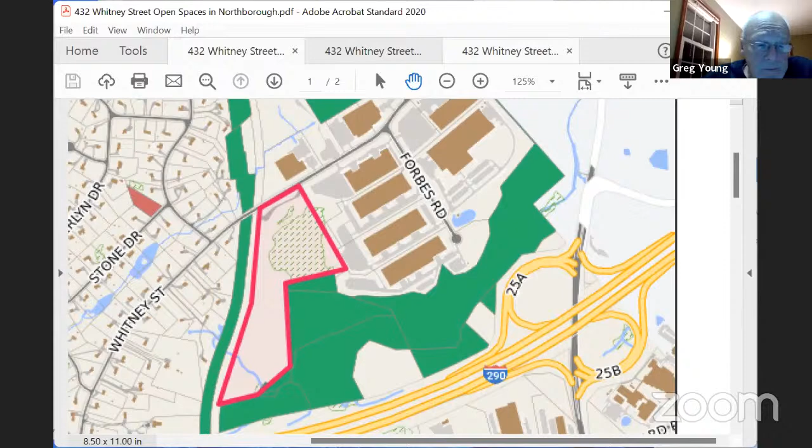Well, it's interesting. But like Todd said, Diane, that's probably a ways away. Mhm. Well, in the meantime, go down and tell all the deer that live down there that they can't have that for housing anymore. Okay.

All right. So we're looking for a vote here from the Conservation Commission, then you can document that and send that up to the board. Yes, I will send up a memo to the select board with a recommendation from the Conservation Commission. Okay. All right. I mean, my personal position is I'm kind of on the fence here, but when I start looking at some of the what ifs that could happen if it's taken over by the rail company with very little interaction on our part, then it's probably the right way to go. So,

I take it the private person who was going to buy this has backed out. Wasn't there a private person? No, there's an accepted purchase and sale agreement. Okay. That's what's kind of driving this whole effort, I think. Right, certification of purchase and sale agreement. Yeah. So they have a certified P&S. Okay. And Howland Development is the nominee or assigns in Wilmington, Mass. I know it's been an interesting ride for a while. So,

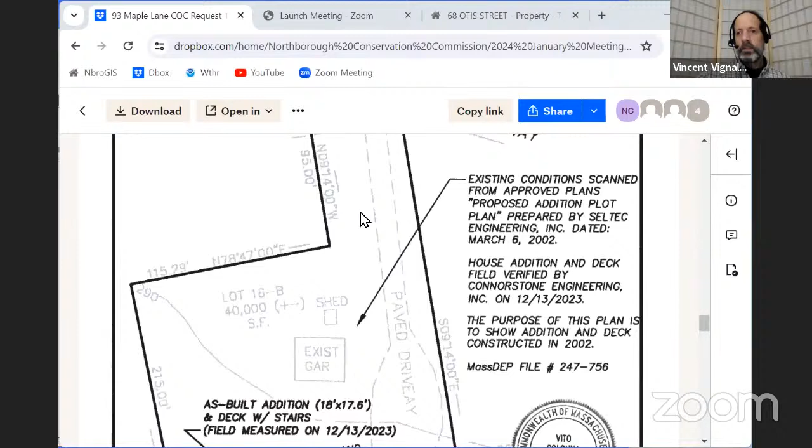So it's not tough, but so here we have the site. There you go. It's 93 Maple Lane. It goes in a little cul-de-sac, or I'm not even sure. I guess it's a cul-de-sac, dead end. It goes into Bartlett Pond. Bartlett Pond's on the west end, bottom of the picture here.

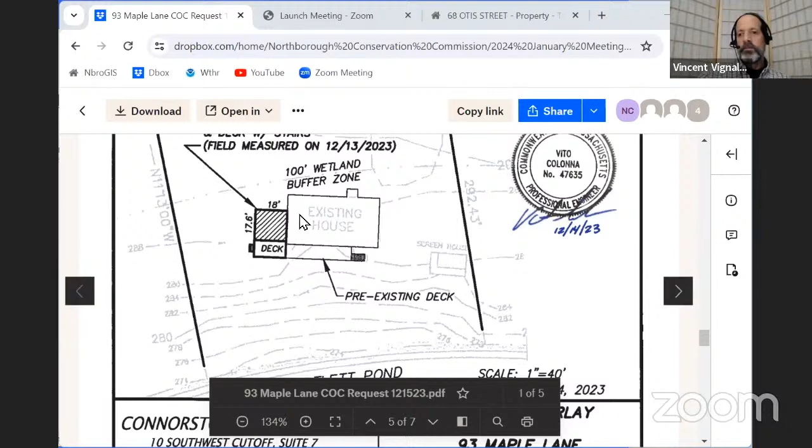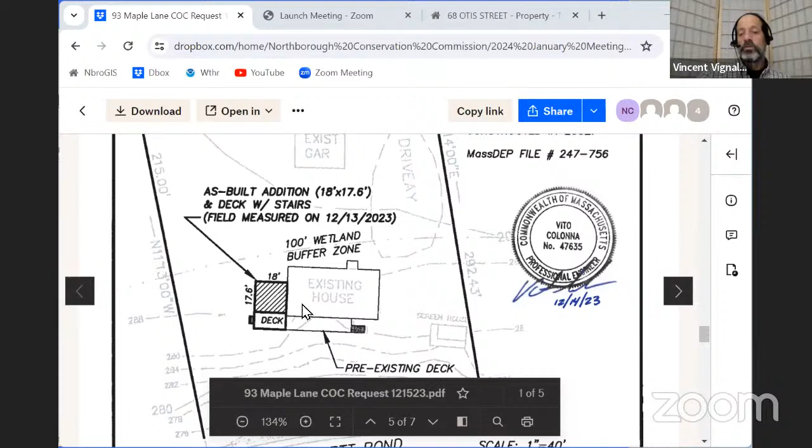Bank goes up. The people back in 2002 had a house there. They got approval for an addition, and the commission issued an order of conditions. They didn't issue an order of conditions for a deck, but the building application had both an addition and the deck. So I believe that both were constructed back in 2002 and received a certificate of occupancy back in 2002. So for some reason the commission just didn't include the deck, or just assumed the deck was part of the construction, but it wasn't in the submittal. So that's what they had done.

Looks good. Yep. I think Wayne used to have, his house was next door to hers. His last house? Yeah, Wayne Baldelli, when he was on the board. Yeah, but he lived next door to her, I think. So I mean, this is 20 years old, Vinny, right? It happened 20 years ago. Yeah, almost older than me. So, that's right.

So do we have any reason why we shouldn't issue the COC? Well, just that they didn't have the deck, but it's been 20 years, like you said. So I think it should be fine. I didn't see any issues. There's no environmental issues. Right. Any questions from the commission? Anybody have any other opinions here? What to do? No, I'm good to issue it. Yeah, me too. All right.